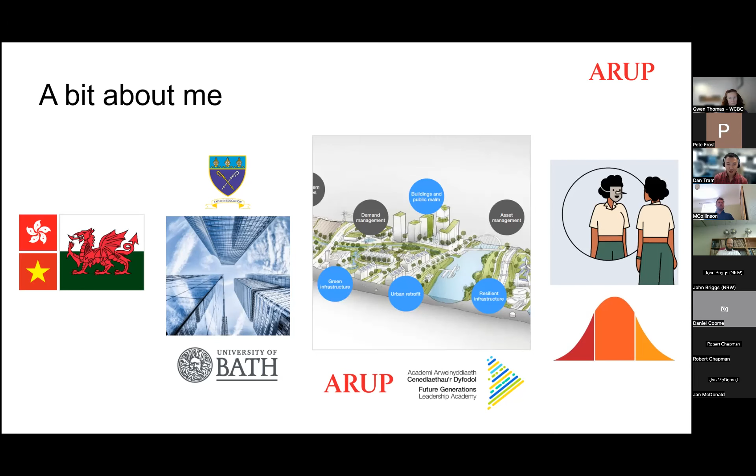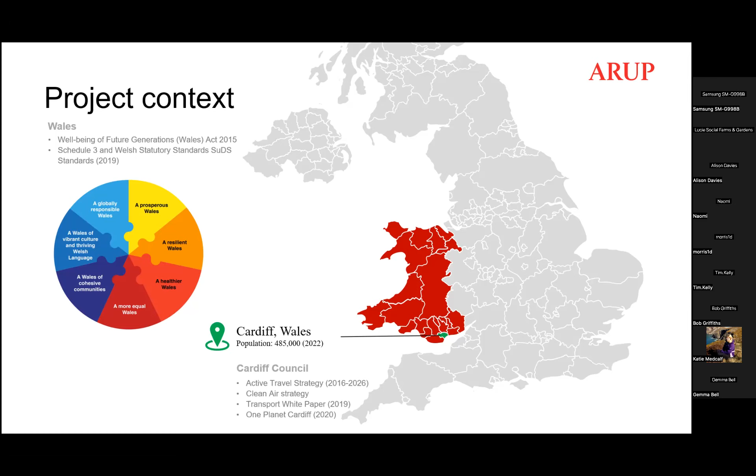And so for a bit of context for the project, we've got different legislation, as a lot of you on the call will know. Wales-wide, we've got the Wellbeing of Future Generations Act, which in and of itself is quite high level. But what's been really encouraging since is other legislation and guidance that filtered from this act that prioritizes well-being, and so then it translates more to industry level. And so, for example, in my line of work, we've got Schedule 3, which was enacted in Wales in 2019. And that was one of the key aspects of Wood Street Central Square.

And so within the legislation, there is a process that you need to go through. And so as part of this overall project, we took through Wood Street, considering how we can apply SUDS from the very beginning, which was really important. And then this project is based within Cardiff, right in the city centre. And it is within the sweet spot of a lot of these strategies that the council has either previously or subsequently released. And so key ones being Cardiff's active travel strategy, which fits as part of the transport white paper. So Cardiff Council have stated how we can transition to become net zero, and particularly from transport, how we do that by prioritizing sustainable modes of transport.

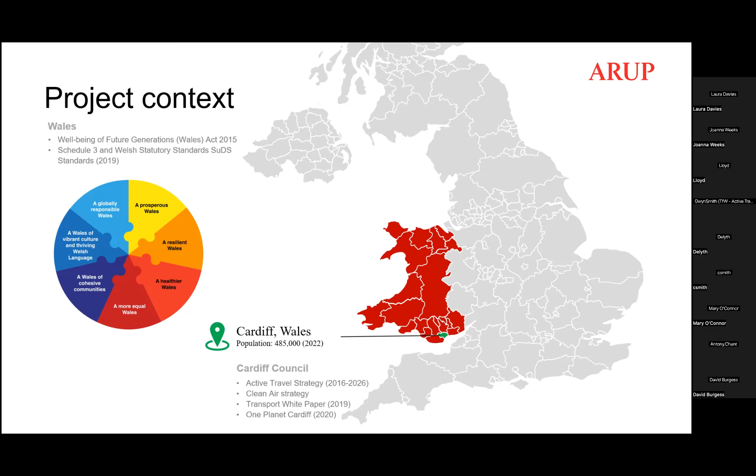And then more broadly, we've got One Planet Cardiff, which touches on other things to do with perhaps water or carbon, nature, biodiversity. And so Wood Street hopefully can be used as a precedent about how we can do some of those things, and also learning from things that maybe we could have done better to make sure that we can see these benefits and interventions done at scale across Cardiff.

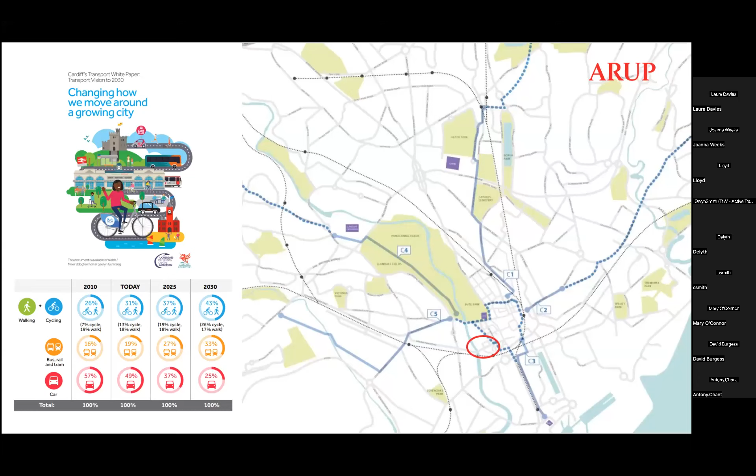From my point of view, I sat alongside the highways designer, who was Cardiff Council in this case. And there was also street lighting design and telematics that had to be reconfigured as part of Central Square. So that's the design phase. Then when it got to being built, which happened within COVID, which I'll touch on later, Knights Brown were appointed to be the contractors for Wood Street. I would be pulled in for some design queries, and we could try and understand what the problem was and figure out a solution together.

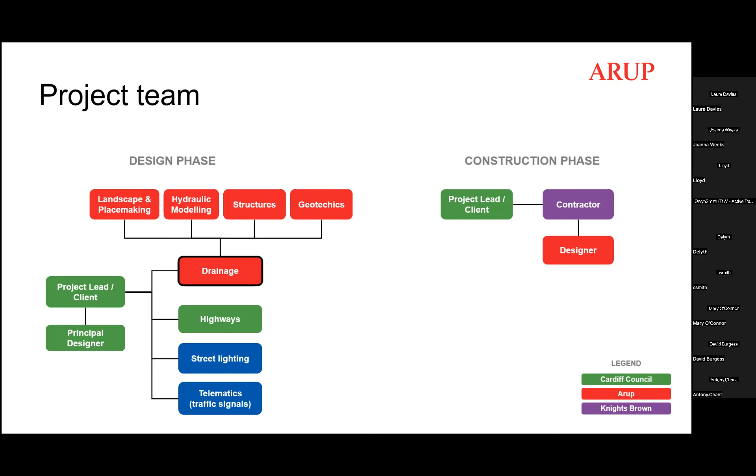We wanted to make sure that the public realm was improved. I don't know if you knew Wood Street before; I've got some images in a sec of what it used to look like. But as a pedestrian, it wasn't a nice place to be. You had quite narrow pavements, imposing buildings right next to you, and quite a busy road, which wasn't the nicest to cross.

And I mentioned the active travel piece, high quality cycle infrastructure, which needed to fit within the space. We wanted to improve air quality, linked closely to the numbers of cars traveling down Wood Street. And finally, it needed to be a SAB compliant design. That's to take the project through the SAB approval process, which ran alongside planning, but we needed to demonstrate to the officer within the council that our design considered sustainable management of water.

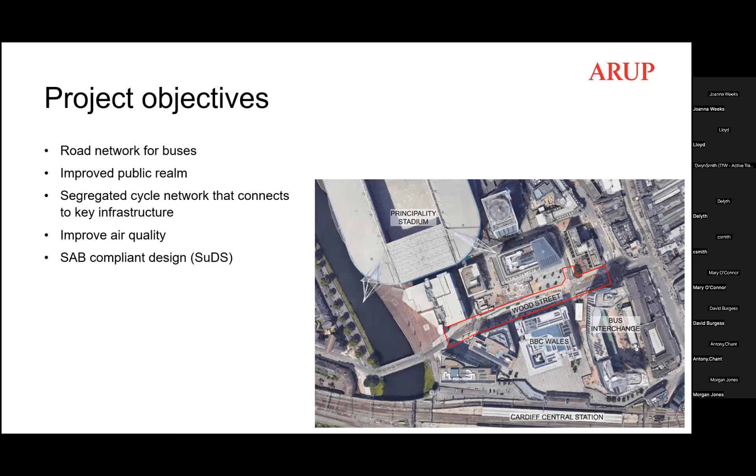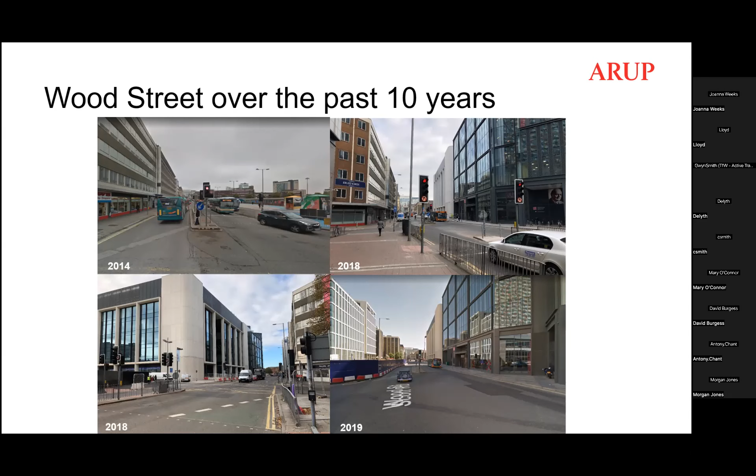And so even you've got these flashy new buildings either side, the new BBC Wales headquarters, some Cardiff Uni buildings, it really needed to have nature be brought back to the city centre. And so that was part of our remit, was looking to redevelop some of the public space, that being pavements, roads, but also making it greener.

So the nature of how central the project was, we came against lots of challenges. One of those being the age of the street. And so when you look through the ages of how Wood Street used to be used, it was very different originally. And so, for example, as we were doing some of the ground investigations, the contractor found broken window frames, which used to form the terraced houses, which were at a lower level.

And then back in the day, those houses were flattened, but not even properly cleared. And so there was remnants of what used to be. There's also some tram lines that Wood Street used to be used for.

One of the other challenges was when we were building it, any excavations that happened needed to get either reinstated or with fencing to separate people. Because when the road gets shut, we needed to make sure it was still safe for fans attending various city centre events. The image on the right was taken on Wood Street, and it gives you a flavour of the number of utilities that we were up against.

And so in design, which I'll touch on in a bit, we knew where some of them were, but when it came to building it, there were a lot more that were uncovered that we didn't realize or were in a different place than what we thought. And so having to navigate our designs to put them in the ground was a humongous challenge, but something that we managed to overcome.

And then again, being so central, there were lots of stakeholders who wanted a say in what was going on because it would impact them, road closures, and also how the street would look afterwards. And then just to add to the complication, we got hit by COVID, and that was when the contractors, Knights Brown, were building it. And so that had knock-on implications for cost and program, but I guess also had the benefit of the road actually being quite quiet when it came to building some of this, so that was good.

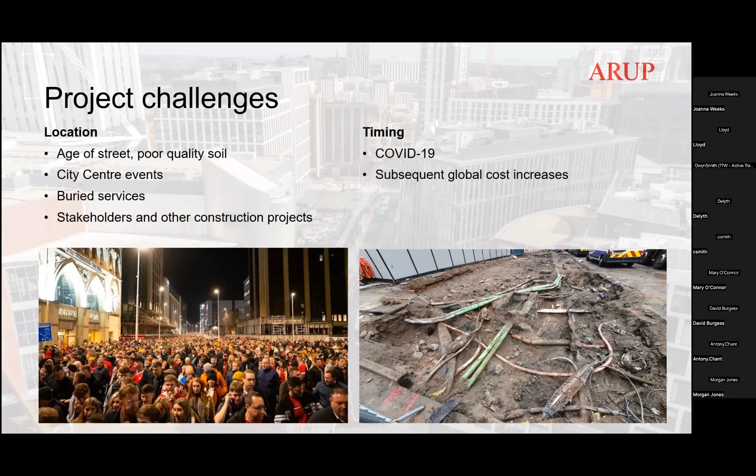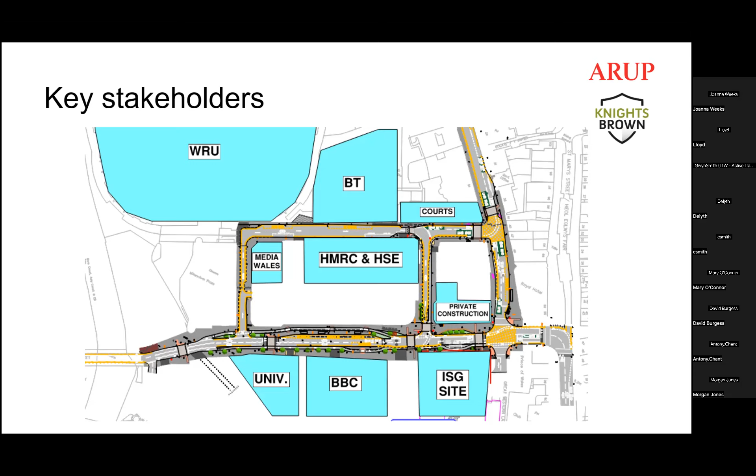We had private development happening adjacent. So the ISG site there refers to the bus interchange. And then there was also the other buildings, which included HMRC on the other side. And so having to try and negotiate construction windows with those people was something that the contractor managed really well.

And so I guess more from my experience with the project and the design, I'll touch on that briefly. And so this is the layout that was sent to us by Cardiff Council's highways team. This was the layout that would serve the bus station well, but now we needed to understand, okay, where are the opportunities from introducing sustainable drainage and nature back to this area?

And so we worked with our landscape and placemaking team to understand pedestrian desire lines and where dead space would be. And so we showed where potential above ground interventions could change that proposed paving. And so that was one aspect, but then we also had to consider utilities.

From an opportunities point of view, we were aware of a new surface water sewer that was laid to serve the new developments within Central Square. And so this was something that was really challenging to lay within the road because of the density of existing utilities, but it created a new pipe that would connect to the River Taff, which was just to the west of our site. And so we saw that as a real opportunity. Can we make sure that that asset could receive the volumes of water we'd be putting into it?

And if so, let's make the most of that rather than having to try and lay up a pipe adjacent, which I was informed by contractors from the adjacent sites that there's no chance, it's too congested. And then from the challenges point of view, we became aware of this large gas main that ran within Wood Street. And so what that would mean is we'd have to cross over the top of the gas main.

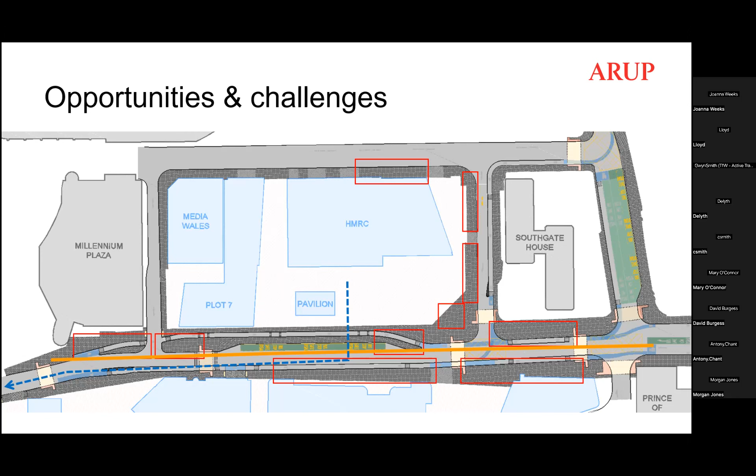And so it meant that any of the opportunities we'd identified to the north of it were going to be much more challenging to put in because we'd have to be that much more shallow than we would have been had there been a blank canvas. And so during the design phase, a ground penetrating radar survey was commissioned, which scanned where a lot of the utilities would be.

I appreciate there is margin for error depending on what type of survey, but we proposed lots of trial holes across the site because we needed to confirm key things like pipes and where rain gardens and tree pits are going to go. But it was decided that because of other city centre disruptions, trial holes weren't going to be an option. And so we had to rely on the GPR survey data.

And so using that, we then proposed main pipes that would connect onto that existing surface water sewer I mentioned. And then that would convey water once it had filtered through our SUDS solutions. But in the north, we proposed rain gardens, which included a vegetated system with trees. So that would receive water from the surface, and that would deal with the north lane of traffic. And then in the southern lane, water would flow into buried tree pits.

And the reason we opted for tree pits was the pavement was on the narrower side. And so we didn't want to uncover and create plant beds. We wanted to reinstate paving to widen pedestrian movement as much as possible. And so there were two types of intervention that we opted to go with. And we had to try and slot that within existing utilities where the space was, where vehicles needed to move between, and try and negotiate with street light positions and traffic light signals.

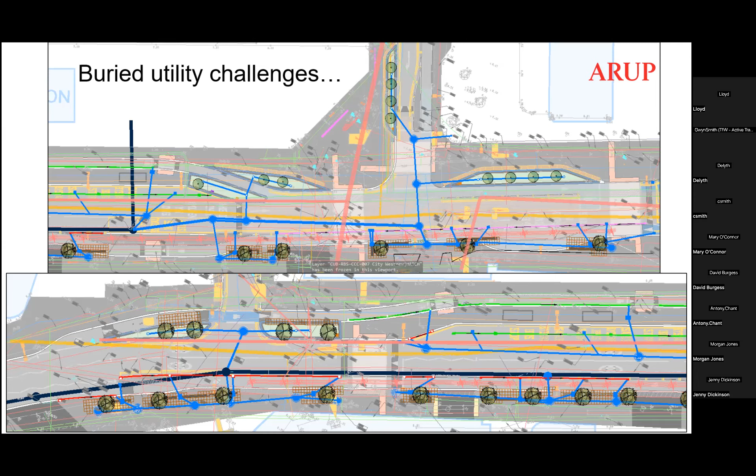And so, yeah, I mentioned the different types of SUDS solution, rain gardens in the north, tree pits to the south. And so this is what the drainage design looked like for the whole of our red line boundary. It's a bit small on screen, but the small brown squares: where depth was not as much of a constraint, we proposed soil cells. That would be plastic crates, which would increase soil volume to enable larger tree species to be planted, enable those trees to thrive and reach their capacity, but also double up as attenuation. So they could store more water, treat more water.

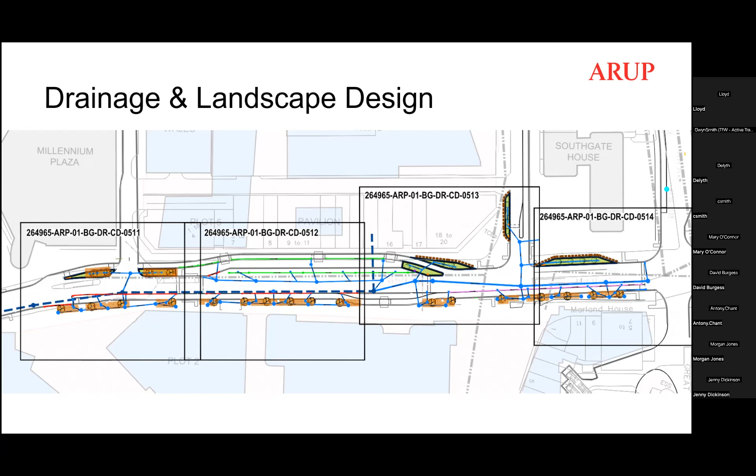And so we wanted to put in extra soil where we could. And in some cases that would span underneath the adjacent cycleway. What we were keen to do is stay outside of the road surface itself where vehicles would be driving directly over, and I mentioned that was because of that large gas main. So then there's four rain gardens to the top right, which didn't have soil cells. We needed to make those as shallow as possible so that we could cross over the gas main while still providing the green space and trees for that part of the project.

And so to talk a little bit more specifically about the tree pits and rain garden design, we used a combination of off-the-shelf products to try and reduce costs, but also improve ease of construction and how things would fit together. The site itself was quite flat, and so we needed to introduce ways to get water off the surface as quick as possible when it rained. And so one of the main methods we chose was combined kerb drainage. And then at different points along that kerb drainage, water would drain into the soil cells behind, where the tree would be and the roots would grow out.

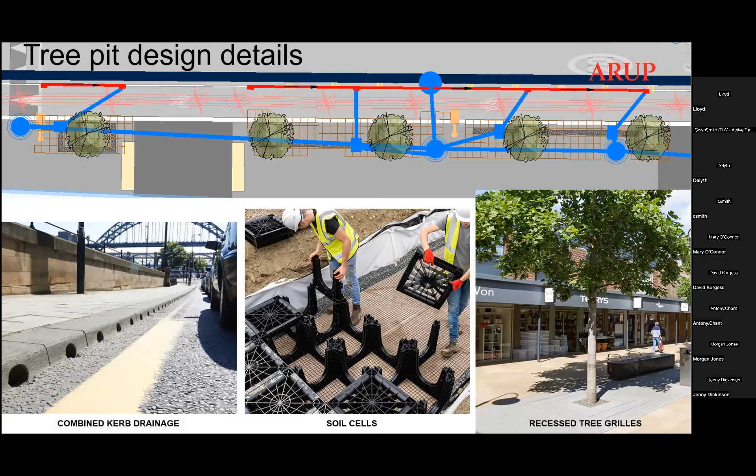And then I mentioned the use of the recessed tree grille. And so in a cross-section of the details that we designed, the low point was not ideal. It was actually between the cycleway and the road, further away from the tree and the soil than we would have liked. And so we needed to get water from that low point into the soil system above the top of the soil so it could filter all the way through. And then once it had been filtered by that tree pit, we needed to get that water that was now cleansed back into the main surface water sewer network, which was within the road.

And so what happens is when water hits the surface, it reaches that low point, and then it's conveyed by the kerb drainage back into the soil system through a pipe, either through gullies at regular spacing or the outfall unit. Water would then, in normal rainfall events, percolate, filter through the soil, the SUDS soil mix, and then the water that reached the bottom would make its way back into the road through a pipe and then into the River Taff.

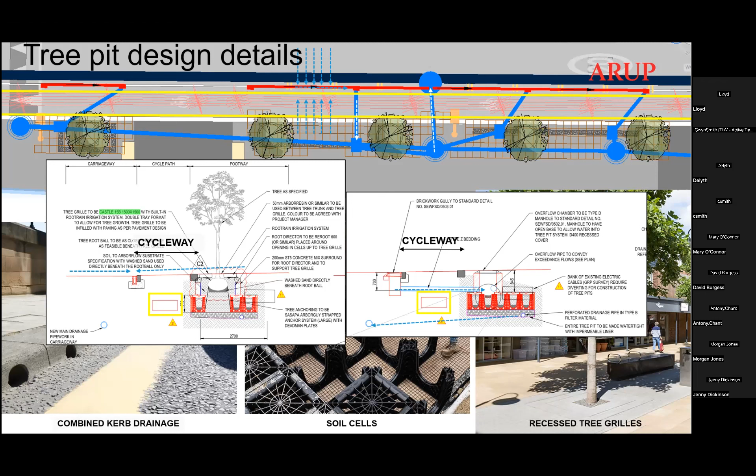But one thing to also draw your attention to is that there were some high voltage cables that were identified during design. And so what we proposed doing was diverting those underneath the proposed cycleway. Recognizing what depth that was going to be, we proposed our pipework to come over the top of the high voltage ducts so that it would be above the soil. And then once it had been through the soil, it would go underneath that high voltage duct to get back into the sewer network.

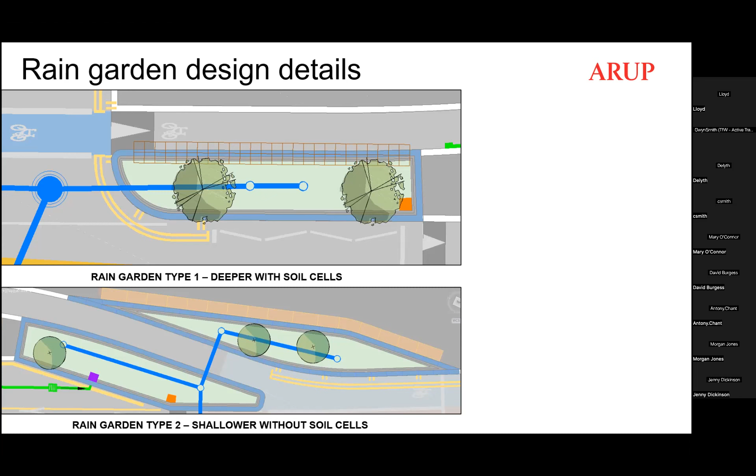And then to talk more about the rain garden details, I touched on the fact that some of them would have the soil cells and some wouldn't. So we've got a deeper version and a shallower version. The detail of those looked like this. So rain garden type 1, we looked to use the soil cells which spanned underneath the adjacent cycleway. The cycleway wouldn't be loaded in the same way as the road, and so that was going to be the better solution to increase soil whilst not being at risk of structural integrity being compromised. So that was the deeper system.

And then the shallower one, we were really squeezed to be as shallow as possible. We specified trees that could deal with this, but we didn't want to get rid of the trees and just have planting. And so we were able to negotiate as much depth as possible.

I think one detail to draw your attention to is the flush rain garden edging. Initially, particularly the highways team were not too sure about this option. We were going to have lots of traffic driving down this very key road, particularly when the bus station was opened. And so, if you haven't got an upstand, isn't that going to be more of a health and safety risk? So we understood a lot of the risks and then presented a solution.

One of the challenges you have is if there was an upstand on the curb and a vehicle was to hit it, you're introducing a much greater point load on that section of curb. And the challenge of this type of edging versus a normal curb is that you don't have the soil behind the curb to resist the loads. We had loose, uncompacted soil within the rain garden. And so we needed to try and reduce those loads as much as possible.

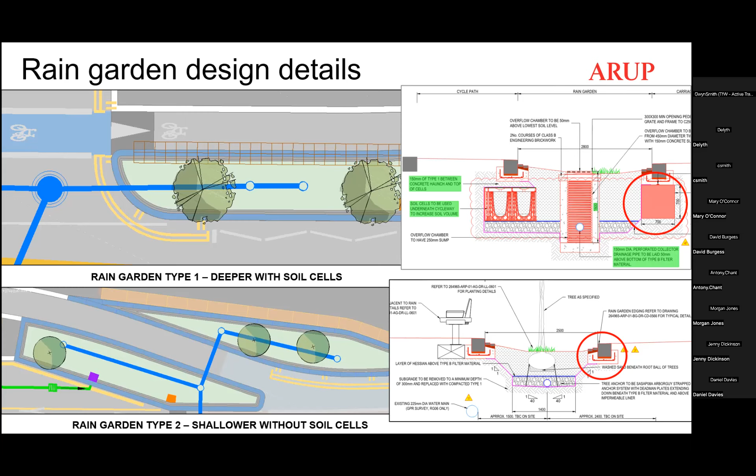What we chose to do in this instance was to build a mass concrete wall beneath the curb. Although visually you wouldn't be able to see it once the project was finished, that just makes sure that the curb doesn't go anywhere and it still provides support to the adjacent highway. One of the other benefits was that we could have the increased soil volume on the rain garden side of the wall too. So those are two little things that distinguish the different types of rain garden.

And then to touch more on the construction side of things, one of the challenges I mentioned is the location, and we've got events happening right next door. And so how are we going to make sure that people aren't going to be adversely affected and we can still guarantee safe movement of people? And so Knights Brown worked really carefully about the phasing of when things would get built.

There was also close liaison with Cardiff Bus just to make sure that with some of the changes to the road network temporarily, that was not going to affect bus operation across the city. And so, yeah, Cardiff Bus were one of the really key stakeholders to make sure that when it was getting constructed, it would still work.

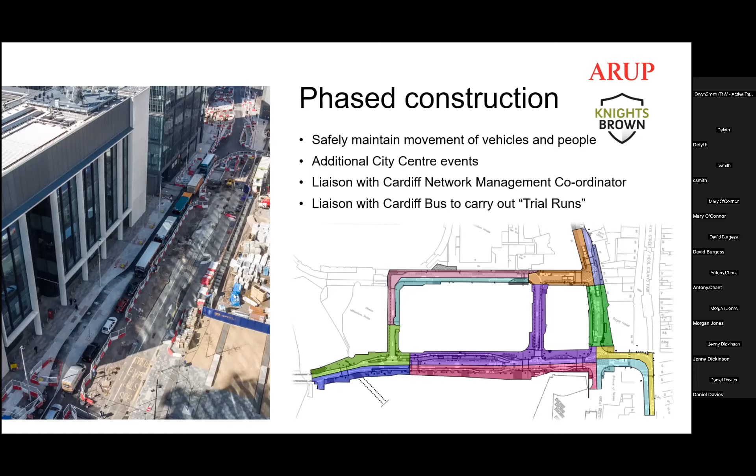So some photos that I was able to take during construction, well, not the drone photo, that wasn't me. But one of the benefits of having a project on your doorstep was, even though we had COVID, we had one bit of exercise you could do a day. And so I'd get on my bike and get to town, and then I could meet the contractor and just see some of the progress. And it was quite special seeing some of your designs become a reality in front of you.

And I think one thing the drone footage shows quite impressively is how big these systems are. And so what you might see at the end is just the tree and some square grill, but actually below ground, the volume of soil we needed to provide for the types of tree, we pushed the boundaries. We made them as big as possible, essentially, from a water quality, but also tree health point of view. And so you can see how much space they do take, even though they get reinstated later on.

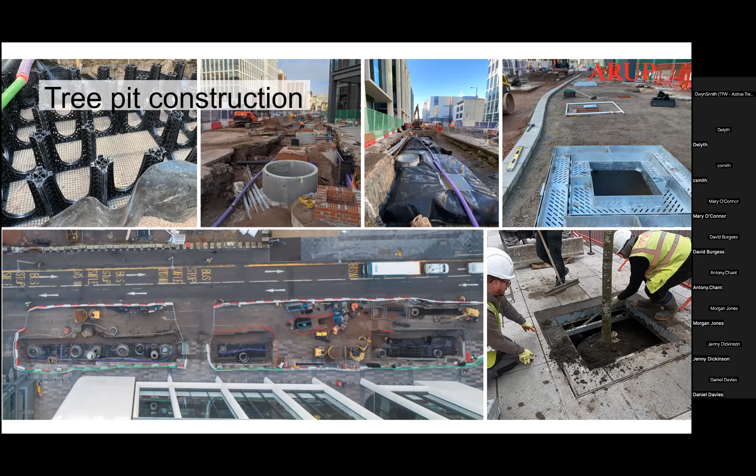The soil cells, you can see they formed part of the rain garden footprint, but they extended underneath the cycleway. And so, again, the footprint before you put the paving back is pretty substantial, but was required to support the size and type of tree, and also to attenuate the kinds of volumes that we needed to reduce flood risk for the area.

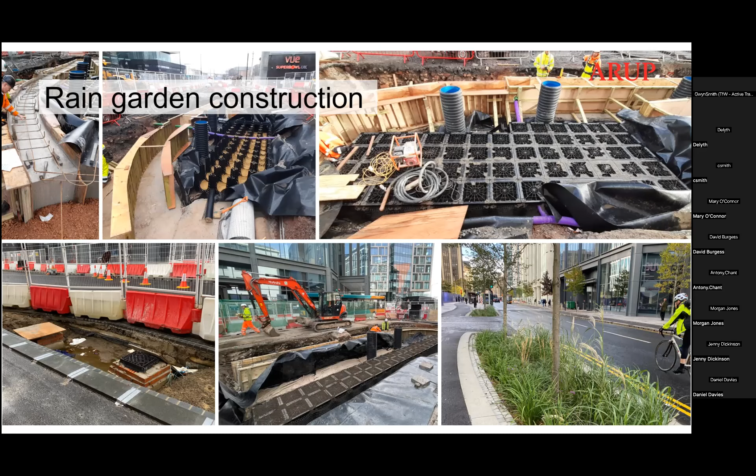But I think the learning from Wood Street was particularly the utilities. I knew it was going to be difficult to build, but I don't think I'd fully appreciated the number of uncharted utilities that we didn't know were there. And so what was so important was that collaboration. We had a really good working relationship with Knights Brown, the contractor.

And so when they were excavating and realized, oh, things aren't what we assumed, we would then come back to the drawing board, which was then on Teams because of COVID, to just understand, okay, what are the things that we found? What are the constraints? And so how can we reconfigure our solution to do the same thing, but it might look a bit different in reality?

And so I guess in the drawing, they're quite neat tree pits in the south. In reality, it doesn't look like that because we just had to work around what was existing in the ground. And I think the other key thing was having a really forward-thinking client.

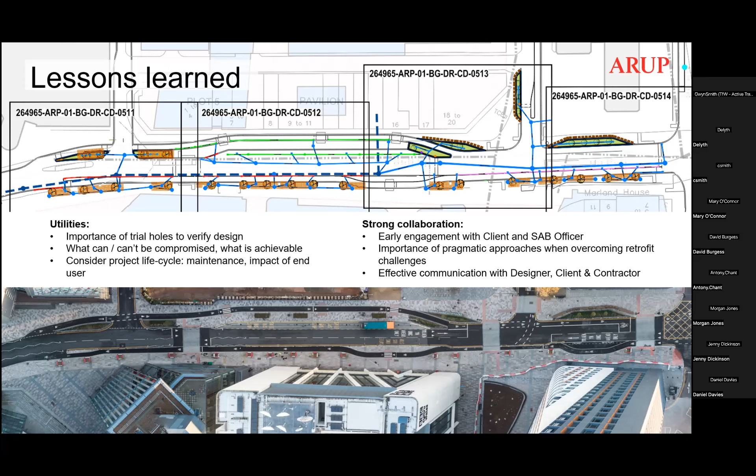And so we're keen, but we know we can't do it all ourselves. So how can we share lessons and learning, and make sure that we're always developing and making things better to see these nature-based solutions pop up across the whole of Wales, not just in the city centres, but in positions that benefit the whole of society as well? I like to end on this slide because when I got sent this footage, I thought, wow, that's pretty cool to see the project from above.